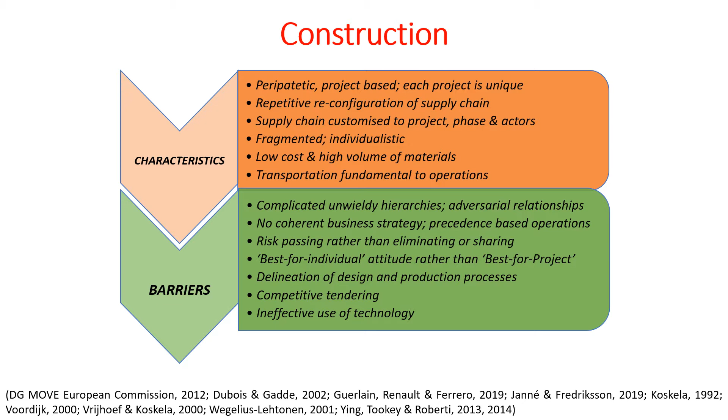The barriers to sector transformation are complicated and unwieldy hierarchies, leading to adversarial relationships. Lack of a coherent business strategy, the operations being precedence based. The tendency to pass risk rather than eliminate or share it. Best for individual attitude rather than best for project attitude. Delineation of the design and production processes. Highly competitive tendering and scarce use of technology.

The New Zealand construction sector is isolated from the rest of the world owing to its peculiar geographical location. It responds comparatively slowly to improved philosophy, resulting in delayed introduction of new ideas. This typically lags UK initiatives by about 8 years. In turn, new initiatives to upgrade construction have major knowledge, understanding, and skills deficits. Its productivity compared to peer domains has not been very encouraging over the last about 30 years.

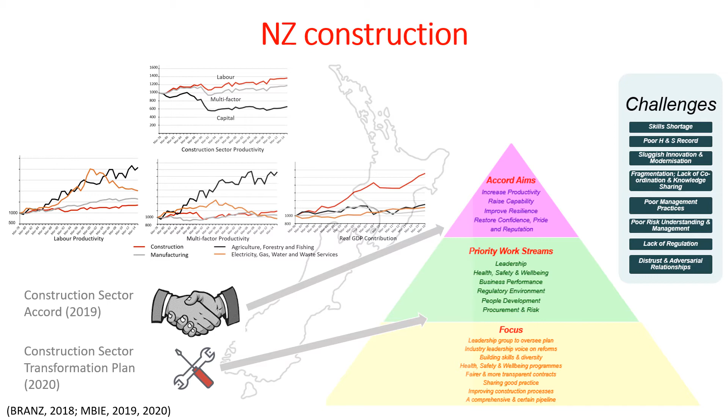In April 2019, the Construction Sector Accord was launched between the government and industry leaders, creating a platform for them to work together to meet some of the key challenges, including skills and labor shortages, unclear regulations, lack of coordinated leadership, uncertain pipeline of work, and a culture of shifting risk. This was followed up by a 3-year construction sector transformation plan during January 2020, a blueprint for resolving the sector's long term challenges around risk, overly complex contracts, and skills development.

The research opportunity has been provided by Watercare, an Auckland Council owned entity providing water, wastewater, and stormwater services across Auckland. They have recently commenced a program to deliver capital water infrastructure in the Whangaparoa Peninsula under a $2.4 billion contract with their supply chain partners over 10 years. It adopts program alliancing as opposed to project by project alliancing from the enterprise model of Project 13 of the UK as a strategic infrastructure delivery vehicle.

At the operations end, it has adopted the Construction Consolidation Center approach as a logistics solution. Both the initiatives are a first in New Zealand, the portfolio-based delivery being a step change in infrastructure procurement. Aiming at 40% carbon and 20% cost reduction by 2024 and 20% health and safety improvements year on year, they create a unique contextual research opportunity, permitting performance benchmarking against previous research in Europe, continental USA, and Australia.

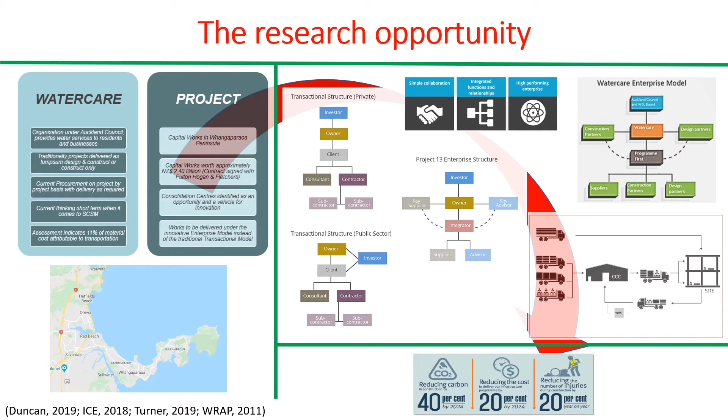Contextual research has been enabled by implementing logistics differently in the form of a construction consolidation center under a collaborative delivery model. The CCC permits close examination of outcomes of modified vehicle movements and fleet composition. It also permits scenario building by superimposing operational data collected onto recorded performance data of cleaner technology vehicles.

The collaborative delivery model enables observing strategic implementation of logistics in the wider domain of supply chain management and project delivery in a manner different from the way it has been implemented in New Zealand so far. The concept is in agreement with the IPCC 2014 report and the New Zealand Energy Strategy to 2050 in reducing kilometers of freight transport, restructuring freight logistics, increasing load factors, and implementing low carbon transport.

Construction material being low cost and high volume, transport is a major component of construction logistics. Estimates show that transport is responsible for nearly half the construction logistics cost, about one-fifth of the construction costs, and almost a tenth of the selling price. In addition, it is a major energy consumer and significant generator of emissions.

Construction transport consumes nearly 40% of urban oil, causes between 16 to 50% of urban pollution, and leads to many times higher fatalities compared to other modes of transport. Related negative social and environmental impacts are damage to biodiversity, noise, congestion, accident risk, gridlock, adverse public health, to name a few. Effects of transport within and outside the domain are therefore substantial, and optimization can have a major positive contribution in terms of reducing or mitigating negative impacts.

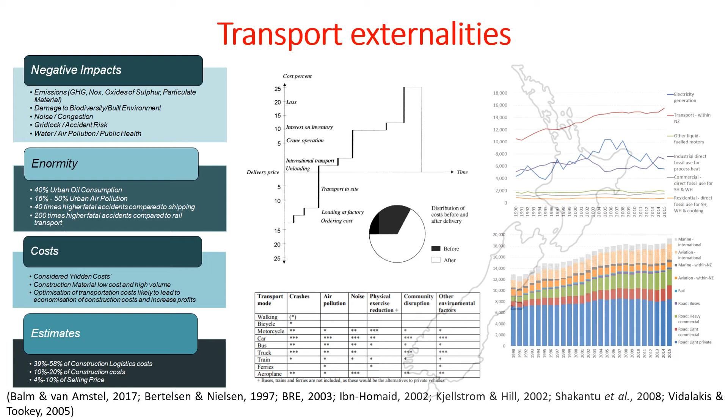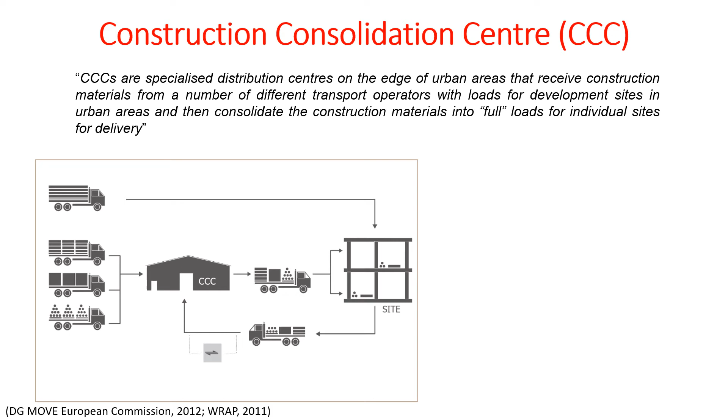In the New Zealand context, freight transport is a major contributor to the greenhouse gas emissions annually, and negative social and health impacts such as pollution, noise, crashes, and community disruption. A comprehensive definition of a construction consolidation center is on the screen. It effectively captures the concept of cross-docking with modal transfer, if required, and reduction in transport by optimal capacity utilization. It also points in the direction of decoupling trunk movement of material from local or retail delivery to site.

A CCC may be seen as a purely transport solution or as a business opportunity. As a transport solution, it is comprised of three components: the demand of goods, the supply of goods, and the physical environment within which this demand and supply take place. Each of these is linked to one or more stakeholders. Receivers generate demand for goods, shippers send goods to fulfill this demand, and logistic service providers undertake deliveries as a direct result of the interaction between receivers and shippers. Local authorities regulate contextual movements, and citizens inhabit the physical environment where all this takes place.

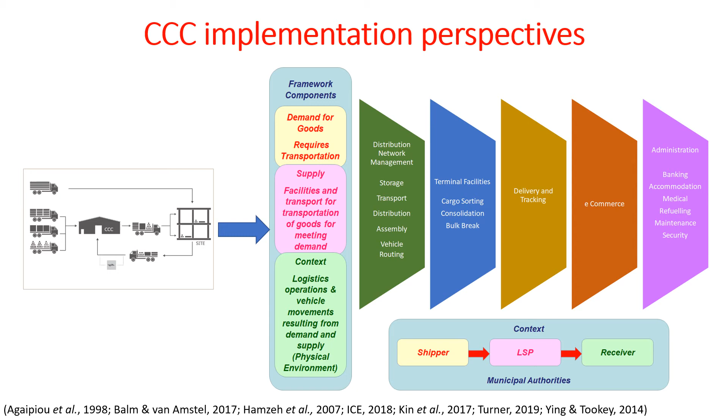As a business opportunity, it provides services to businesses who cannot afford it or do not have the associated management skills. These may be associated with distribution network management, terminal facilities, delivery and tracking, e-commerce, and administration. Some or all of these may be employed based on individual supply chain requirements.

A CCC, when optimally utilizing vehicle capacity, creates certain advantages for freight carriers, CCC operators, receivers, other road users, and the environment. These are reducing delivery time and unit delivery cost, revenue generation by utilizing the time saved, reducing unloading time, reducing number of trips and kilometers, reducing traffic levels and associated problems, improved reliability of deliveries, fewer but larger deliveries, reducing the time to receive them, holding stock at the CCC, freeing up staff time by using the CCC for pre-retail services, reduction in fuel consumption, pollution levels and noise, and the possibility of using alternate propulsion technologies.

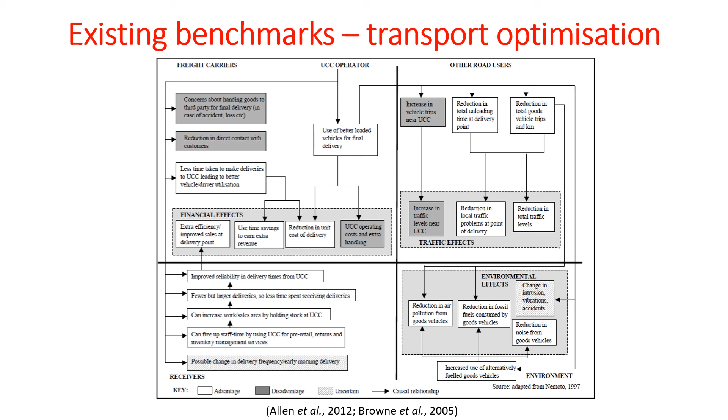As disadvantages, there are concerns about handing over goods to a third party, reduction in contact with customers, addition of CCC operating costs, and increase in traffic levels near the CCC with its associated problems. There are existing documented benchmarks for the operational benefits accrued from establishment of a CCC. These are connected to the use of transport features, use of storage space, and the pre-retail activities.

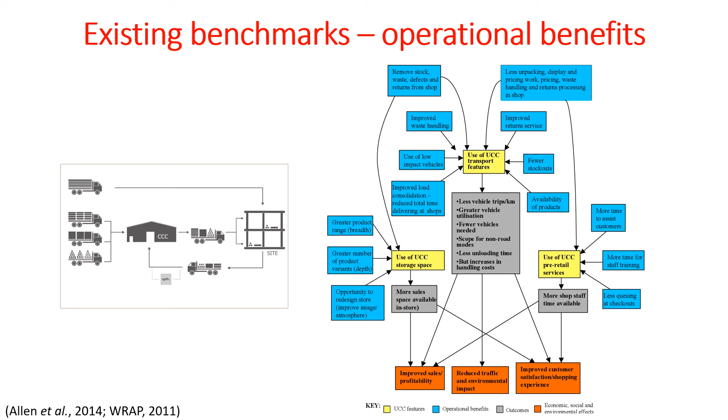A CCC permits improved waste handling, reduced stockouts, improved return service, higher availability of products, use of low impact vehicles, and overall improvement in the delivery process from its transport functionality. The storage space at the CCC permits greater breadth and depth of product variants to be stocked and enables their availability for retail utilization. Pre-retail services enable more staff time to be utilized gainfully, assistance to customers, and off-site construction, reducing raw material stocking and reducing construction effort on site.

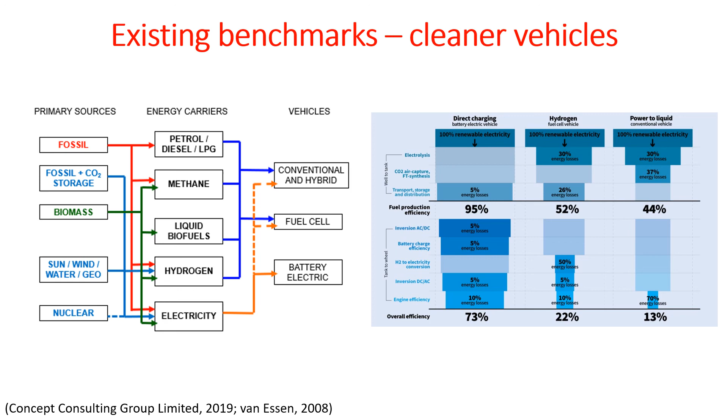The environmental benefits accruing from CCC as a transport solution can exponentially increase by utilizing alternate propulsion technologies for freight transport. Fossil fuels, with their high pollution levels, barely achieve energy efficiencies of approximately 13%, while all electric vehicles at the other end of the spectrum are much cleaner and demonstrate energy efficiencies of up to 73%. Alternate fuels such as CNG and LPG and hybrid technology occupy intermediate positions within this spectrum and are potent means to reduce environmental externalities till all electric implementation is achieved.